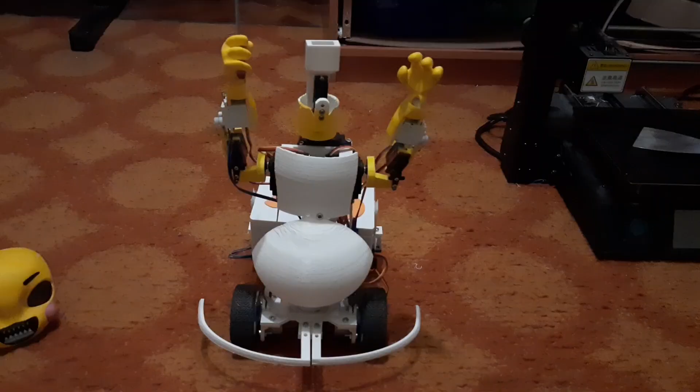Now, I don't have any kind of formal education in any of this stuff, like coding or electronics or anything like that, so I might not do stuff by the book, but hey, it works for me for the most part, and I think it might help someone. Alright, so let's get the tour started.

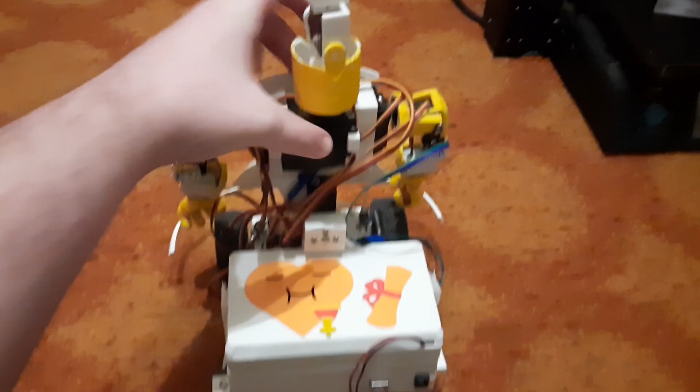I recently made a few changes to my robot to address some issues and tidy things up. I made this little case to house all the electronics for the robot, so now my wires are managed for the most part and everything looks pretty neat.

I felt inspired by BMO from Adventure Time, and I printed and colored these little graphics that I glued to the case. Here you've got a heart with a medal for courage and a diploma. It's a pretty cute little reference, and I really love Adventure Time, so I think this turned out pretty great.

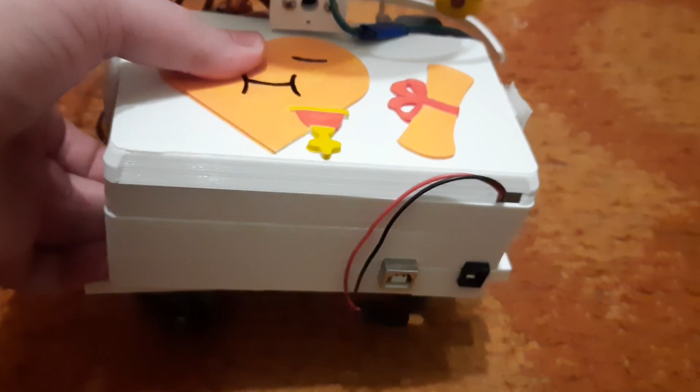So the box itself has two compartments. The first is full of PCBs and all the wiring, and the second compartment has the batteries. I designed it like this just for the sake of convenience, because this way you can keep the wires and PCBs tucked away and have easy access to the batteries if you want to take them out and charge them or put them back in.

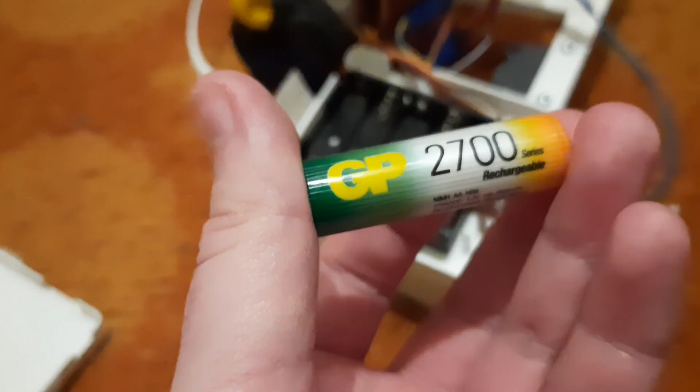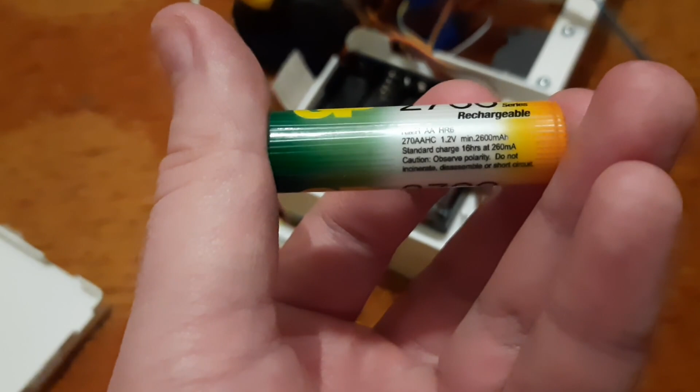For the batteries, I have 5 AA nickel metal hydride rechargeable batteries. These are responsible for powering all the motors of the robot. They're wired in series and they put out around 6 volts. Honestly, if you're going to make your robot wireless, then it's pretty essential to buy some nice rechargeable batteries. Otherwise, you'll be buying a ton of disposable ones.

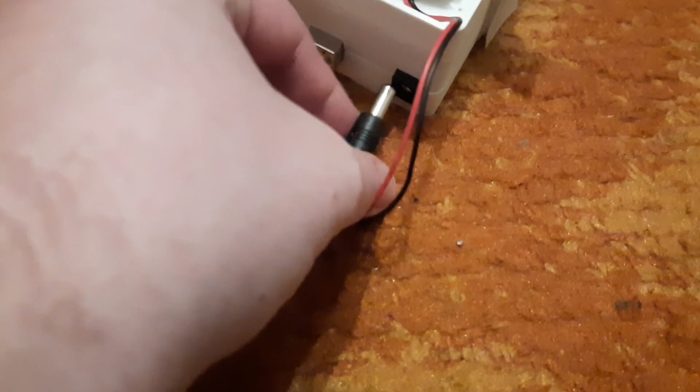I also have this little 9-volt battery here, and this plugs directly into the Arduino Uno if I want the robot to work wirelessly. Otherwise, if I'm coding and uploading stuff all the time to the Arduino, then I just have it plugged into the computer with a USB cable. Alright, so that's it for the batteries, and we can move on to the next compartment.

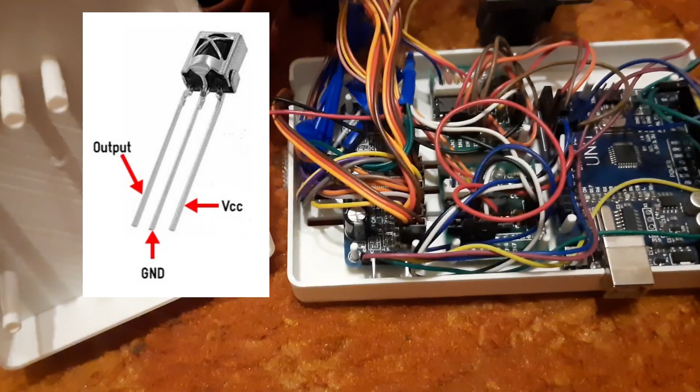And this is pretty much where the magic happens. First off, of course, we have the Arduino Uno. This is a pretty trusty little microcontroller, and it's responsible for controlling the whole robot. So the first thing that hooks up to the Arduino is a little IR receiver. This little guy picks up infrared signals sent from this remote control and then sends it to the Arduino.

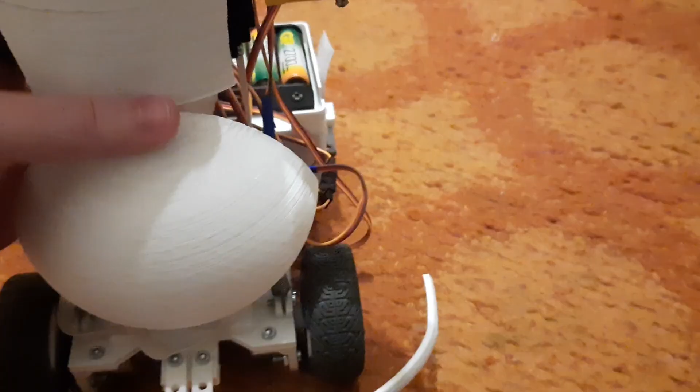With this remote control, I'm able to go through all the different animations I have loaded onto the Arduino. Just click the corresponding button to the animation you want to play, and the robot does the movement. Really straightforward. I know more sophisticated toys and robots usually have some kind of Wi-Fi module to control things with your smartphone or your laptop or computer, but this setup is super simple and I really like it for its simplicity.

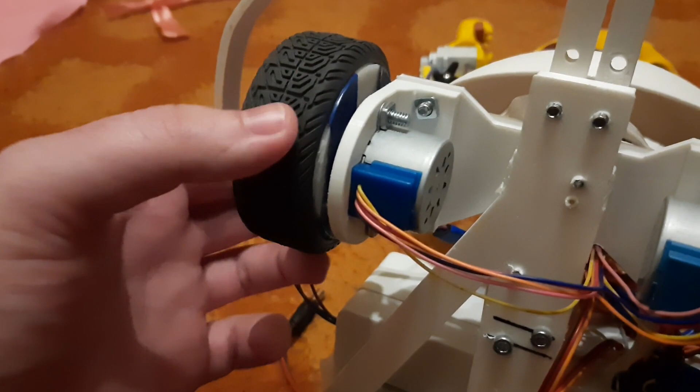Alright, so for the motors, I have quite a few different ones in my robot. I'll start with the stepper motors because there's only 2 of them, and they're responsible for letting the robot roll around on its wheels. And of course, with the bottom half of the robot being covered up by the dress, this creates the illusion that the robot is walking around.

The steppers I use are the 28BYJ-48 motors, and these are hooked up to the ULN2003 stepper driver. I have 2 of them, and then those plug into the Arduino. The steppers and the drivers are really cheap, and they also work pretty well, so I'm quite happy with them.

Next, we have the servo motors. I've got quite a few of them in here, and they're all responsible for the movement of the upper body. There's 9 servos in total, and they're all hooked up to one PCA9685 PWM servo driver, which then of course hooks up to the Arduino.

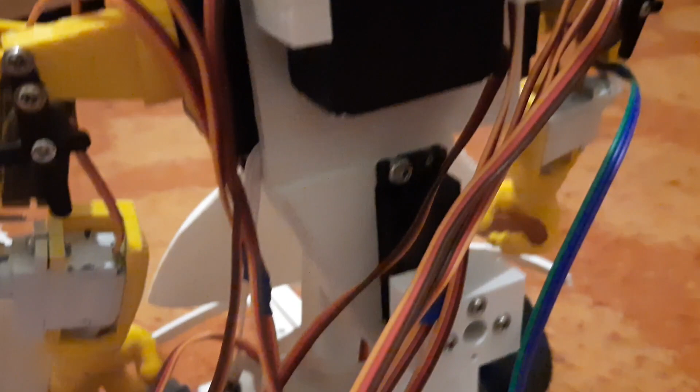The first servo I have is also the biggest and toughest servo. It's a TD8120MG. It's a high torque servo, and it's got about 20 kilograms per centimeter of torque, and it's responsible for creating this side-to-side movement of the torso.

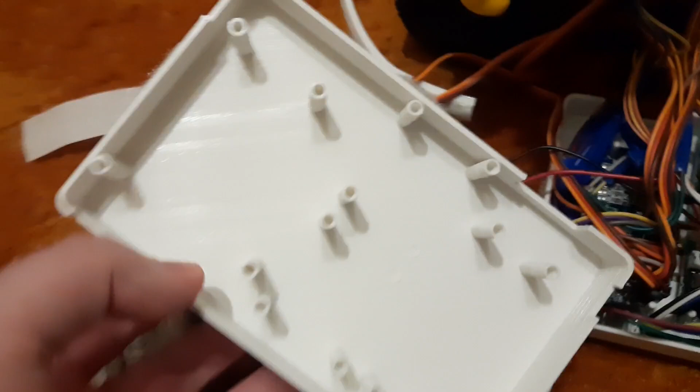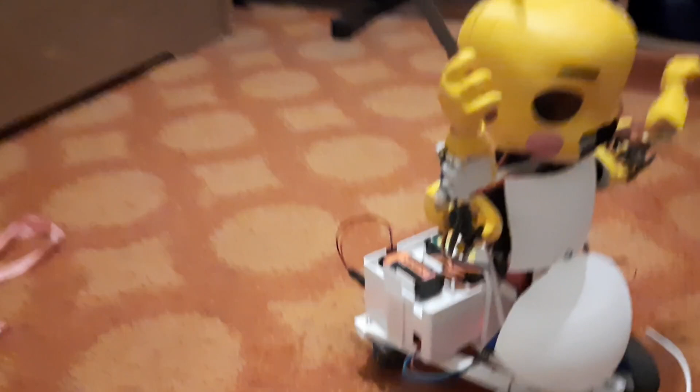Honestly, from all the humanoid robots I've seen so far, I would say most actually don't have any kind of actuator in the torso for this kind of movement. But I think this motion is really great for any kind of dancing animations, and it just makes all the different movements the robot does seem more lively and less stiff.

Next, I have 3 of these MG995 servos, which are responsible for the left and the right shoulder and the neck turning from left to right. These servos are super cheap, and I've heard a lot of people really don't like them, but honestly, so far, outside of them being very bulky, they've worked pretty well for the price.

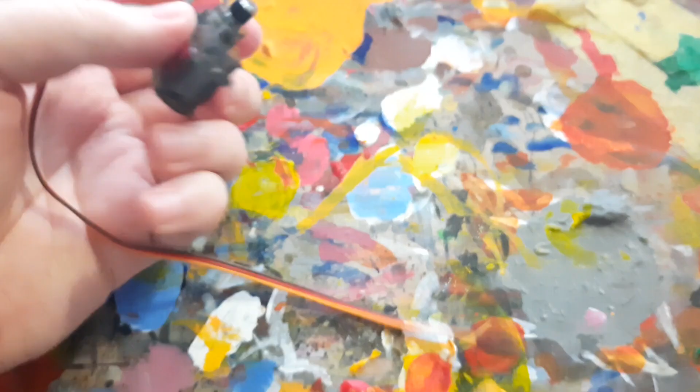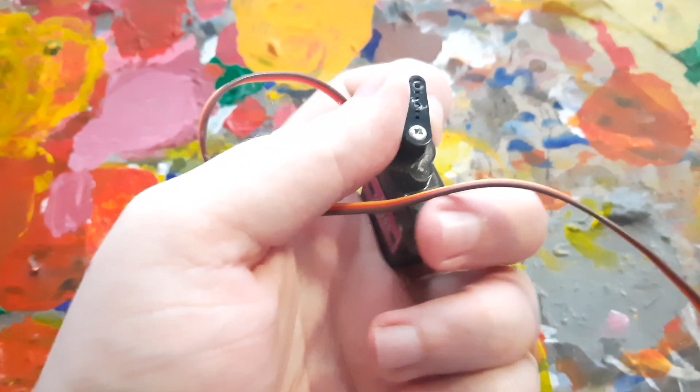And next, we have 3 MG90S servos. These are responsible for the upper arm movement and the tilt of the head. I really like these servos, but for whatever reason, they really don't like me. I bought 5 in total, and already 2 of them have burnt out on me.

I'm not really sure what's wrong with them. It's a real shame because I really like the added torque and the extra stability that you get from the metal gears compared to the plastic SG90s.

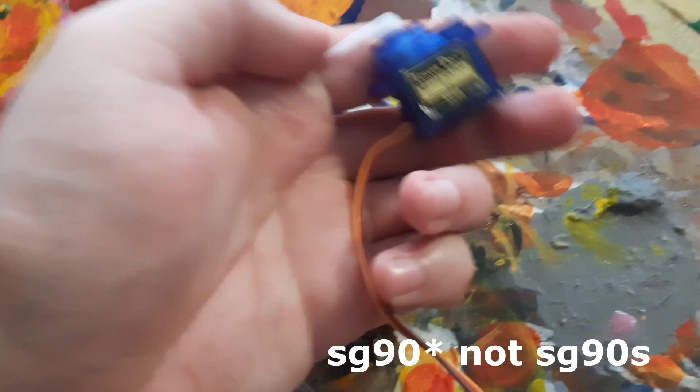But for whatever reason, they've been breaking a lot compared to all the other servos I've used, so I'm not sure if I can really recommend them. And finally here we have 2 trusty SG90 servos, the smallest and lightest servos out of all of them, and they are used for the forearms.

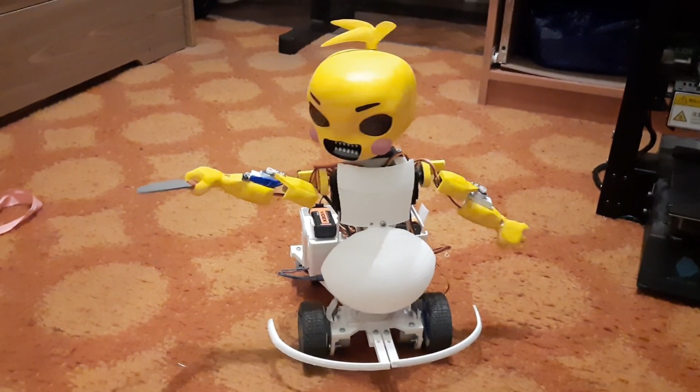And that's pretty much it for all the electronics and the motors. Honestly, this entire robot is very accessible if you want to make something similar. All the parts together would probably be pretty inexpensive. The most expensive thing here would be the Arduino. So if you ever feel like trying to make something similar, I would give it a try.

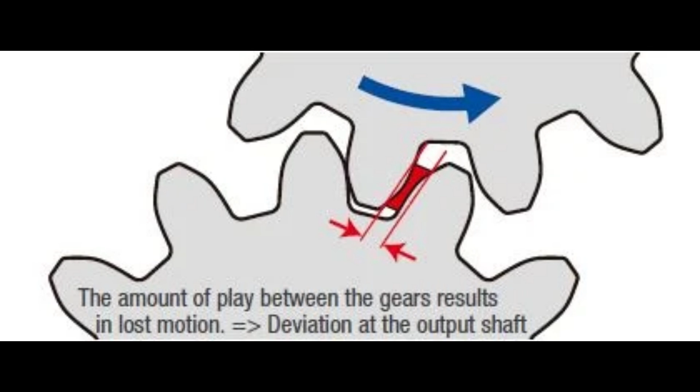There's a few other things I want to mention, and then I'll go ahead and move on to the programming side of things. So one issue I had, which I found a pretty weird solution for, is servo backlash. Basically, since the gears in the servo gearbox have some play to them, and they're not completely rigid, one thing that happens is sometimes when the servo is trying to hold its position at a weird angle, it might start wobbling back and forth like this.

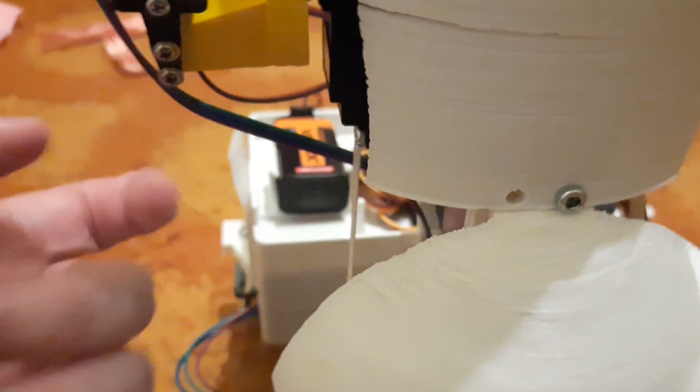One solution I found is to always have a bit of tension applied to the motor so it isn't able to start doing this wobbling thing. And the easiest way I found to apply that tension is this little spring contraption. The springs pull down on both sides of the torso, and the joint is pretty rigid while still being able to easily move when the motor wants it to.

I don't know if this will be helpful for anybody else, but at least for me in this case, I was able to get rid of that jerky motion of this joint and get pretty smooth movement without this wobbling back and forth thing.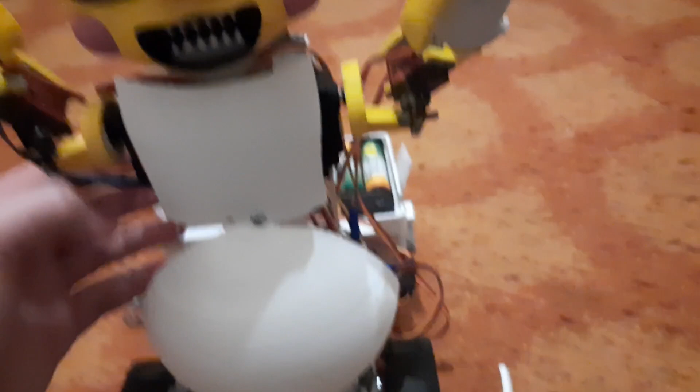One more thing I'll mention that might be interesting is that for the wheel setup, I of course have the two stepper motors, and attached to them are two big rubber wheels. And for the added support, I have these two caster wheels on the other end. This setup works pretty well. It gives the robot 4 points of contact with the ground, giving you quite a lot of stability.

And the setup works pretty well. The robot turns fine, it goes back and forth and all that. So yeah, if you were thinking of building a robot that rolls around on wheels, I can recommend this setup with the caster wheels. Alright, now I'm going to talk about coding a little bit.

And for me personally, this was probably the most difficult part of this project. I didn't know anything about writing code for the Arduino when I started this project, and the code I have now is pretty much just a combination of YouTube tutorials and forum posts, and somehow everything has seemingly worked out so far. So let's get into this, and I'll do my best to try and explain things for you.

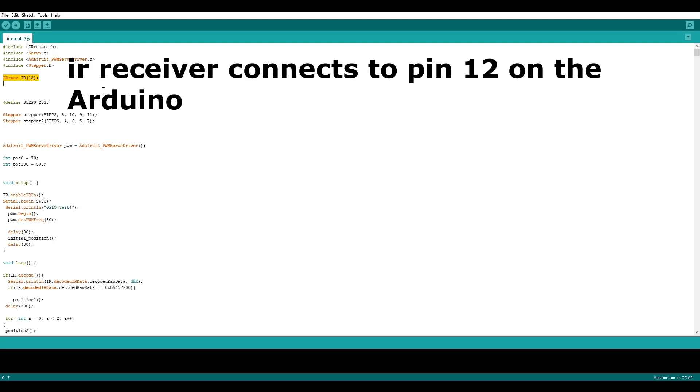First, we have all the libraries that need to be included. The Servo library, the Stepper library, the Adafruit Servo driver library, and the IR remote library. Next is a couple lines of code about which pins on the Arduino are responsible for what. And then there's some code about stepper steps, PWM, and servo angles.

Then we have the setup function, which essentially just executes some stuff and importantly sets the servos to go to the positions that give the robot its starting pose. Alright, so I'm not going to go through the whole loop, but I'll give this example here to show how it works, because the rest of the code is basically just variations of this one example.

First, we start with this if statement, which essentially says that if the IR signal being received decodes to this particular code here, then the following functions get executed. And the functions themselves are just telling the servos to go to different angles and telling the steppers to take a certain amount of steps. And the end result is a sword swing or a dance or the robot waving its hand.

I really wish I could explain the coding portion of this in better detail, but I'm kind of not the most educated on this stuff. But if you guys are struggling with coding as well, you can let me know, and if people are interested, I can make a more detailed tutorial for how the code works for my robot.

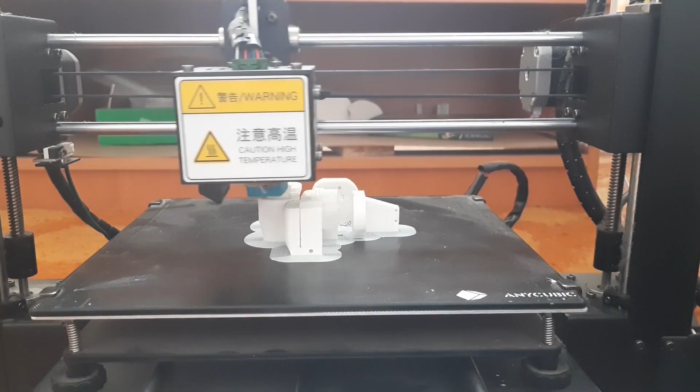Or you can also look into some animatronic animation software like Bottango. There's also Blender plugins for animating your animatronics that could also be worth looking into. I just personally write the code the way I do because it works for me, even if it might not be the most sophisticated way of doing things. So that's pretty much it.

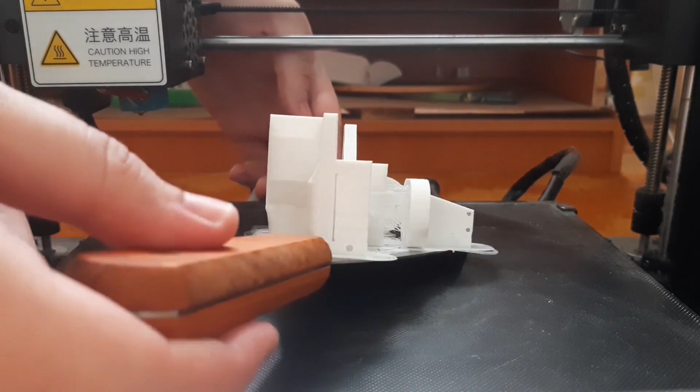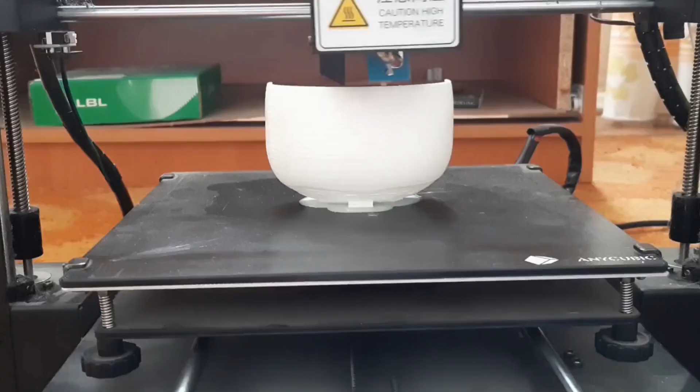One final thing I'll mention is that this entire project would probably not be possible without a 3D printer. The printer I use is an Anycubic i3 Mega S. I got it used about 3 years ago, and even with it being used, it's worked really well for me. I haven't really had any issues with it, and it's overall a really fantastic printer.

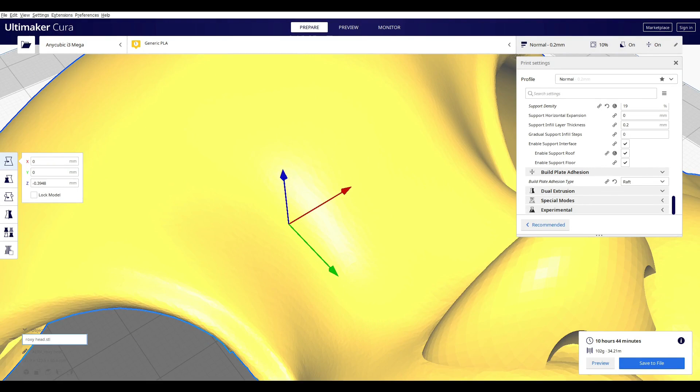Alright, so the next video will be a new character for my robot. I'm making Roxy from Five Nights at Freddy's, and she should be done in about a month or so, maybe even earlier if I'm not too lazy or preoccupied with other stuff.